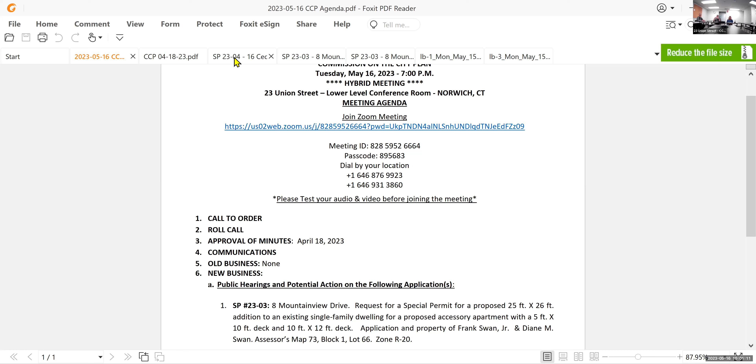I'm just going to read this into the record. This came in today. Dear Ms. Rhodes, on behalf of the applicant, 16 Cedar Street Development LLC, I am requesting a postponement of the opening of the public hearing until the June meeting of the commission.

Thank you. So that was the second public hearing on your agenda today. Do you want to do a motion to postpone that? Yeah, we can do that based on the communication. Can we have somebody make a motion to table that to June 20th? I'll make that motion. Ella's made the motion. Do we have a second? Second, from Dean. Any discussion? Hearing none, all in favor? Aye. Any opposed? Okay, so the matter is tabled.

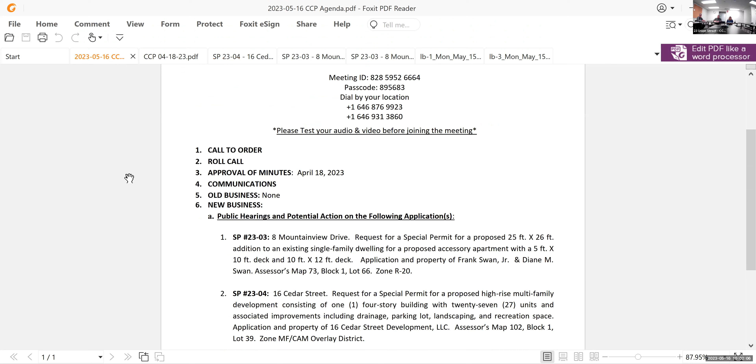Thank you. Again, no old business that I see on the agenda. The first matter we have is special permit 2303, 8 Mountainview Drive. Request for a special permit for a proposed 25 by 26 foot addition to an existing single family dwelling for a proposed accessory apartment with a 5 foot by 10 foot deck and a 10 foot by 12 foot deck. Application and property of Frank Swan Jr. and Diane M. Swan. Assessors map 73, block 1, lot 66, zone R20.

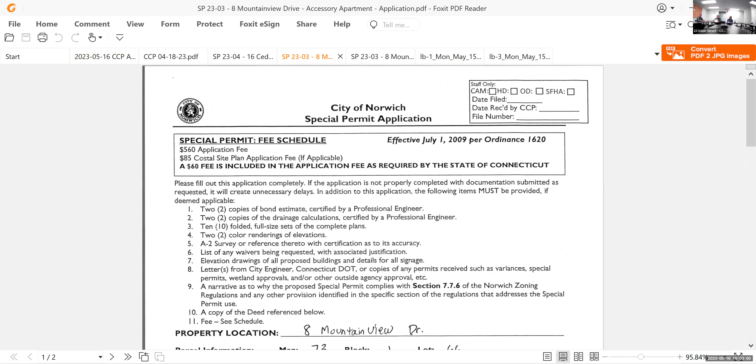So I guess we need a motion to open the public hearing. I'll make that motion. Motion to open the hearing. Second, by Dean. All in favor? Aye. Any opposed? No. Okay, so the public hearing is now open.

One speaker, the applicant. The applicant is here, so do you want him to come up to the table and sit? Mr. Swan? Yes. You're representing yourself. Why don't you come on up and tell us what you're doing? And we'll call things up on the computer, on the screen for everybody to see as well. And if you could identify yourself and address for the record. My name is Frank Swan Jr.

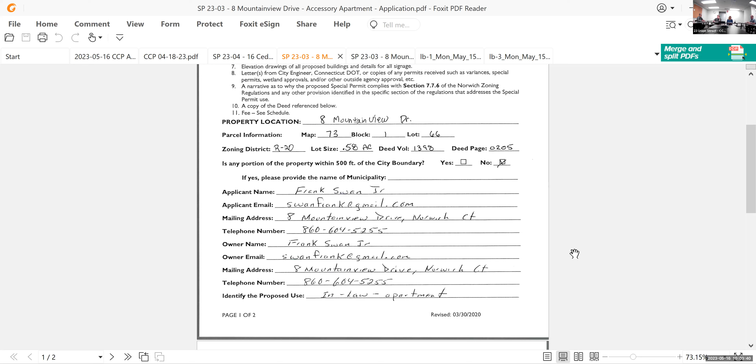And I am the owner, well, my wife and I are the owners of 8 Mountainview Drive, and we are proposing to add an addition onto my house for like a mother-in-law apartment. My mother's getting older and she's going to have to go into a home or we do something like this. That's what I'm hoping gets done.

Okay, so we'll go through the drawings up on the screen. If you could just describe them for the commission members and for the public. Looking from the street at my house, I'm looking to add on an addition on the left side of my house, 25 feet wide, 26 feet deep, and a small 10 by 12 deck in the back of it. On the side of it will be the door entrance and a small 5 by 10 deck, to get into it from stairs.

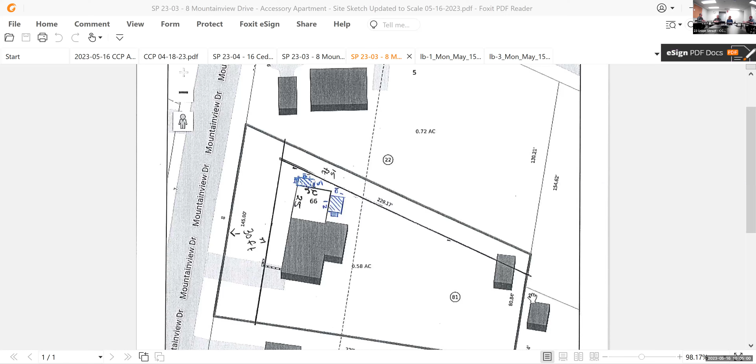Just pretend we're ignorant and don't know anything about it. Is there public water? There's public water there, but is there public sewer there? I have my own septic system with a leach field, and it was done about 5 years ago. So zoning, Uncas came and said that since it was done so recently, they don't think there's any reason why there should be any issues. And then the gas and water will be coming right from my house itself. Due to it being my mother living there, I don't think I have to worry about her ripping me off.

You got to watch those mothers, right? Yeah, it'll be good to have a babysitter. And that's really what the case is.

Those two trees right there are coming down, but other than that, that's the only thing. It'll be shaped just like the rest of the house, like an extension. It'll look like it's all one piece.

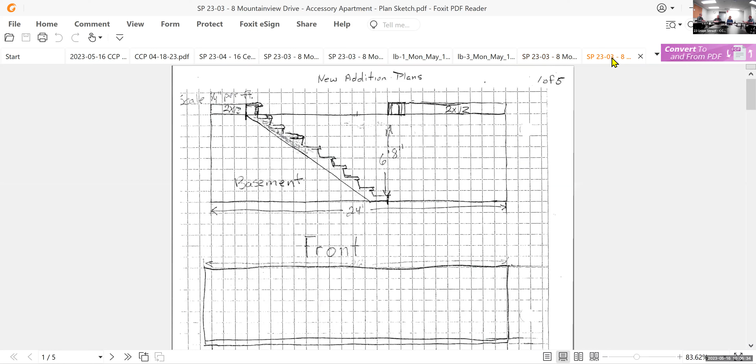The living area will be up at the upper portion. And the bottom, even though it's a raised ranch, will just be for her to store her stuff. So it's gonna be empty down there.

That would be the basement, that'd be the stairs going down. There will be a door, that's the back portion of the basement area. There'll be a bay window and a door to go into it. There's the 10 by 12 deck in the back.

She'll have a very large bathroom. We're hoping to do a walk-in bath, shower for her, so we can kind of wheelchair her as she's getting older. It just says tub on the plan, but it's gonna be like a walk-in shower.

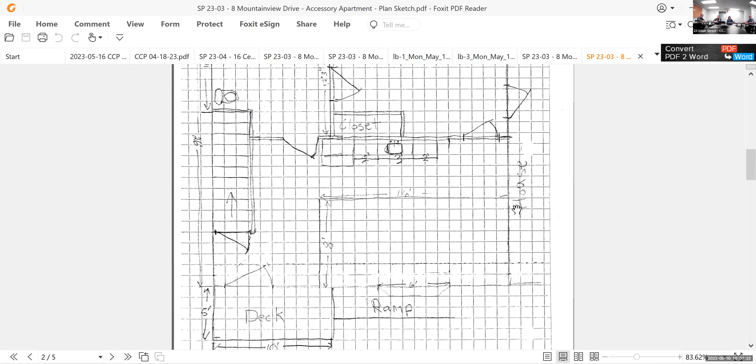That's gonna be her living room to the right, and in the front we'll have a small half kitchen type thing. This drawing is superseded, by the way, because that shows the deck in the front. That's an older one, there's another that got uploaded. I apologize, but the back portion is pretty much the same.

Updated... no, that was me.

I can pass it around if you want. This is how it's gonna look, it's a bay window, I have pictures too. It's just a bay window in the front and another window, and the door is on the side.

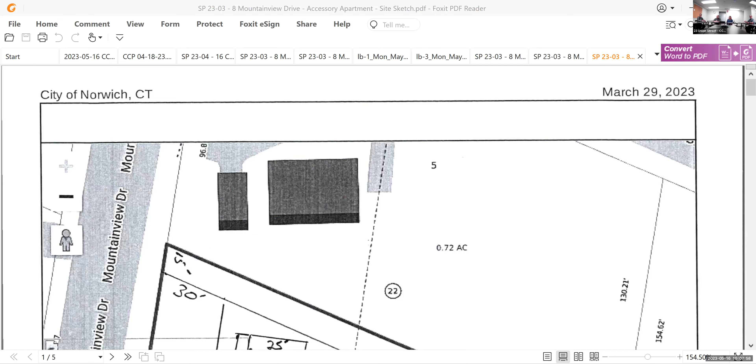Yes, that's it right there. So there's the front to match the other bay window in the front of the house, and then a door. That's the side, right down here. Yeah, the next one down showed the picture of the deck on the interior, and that's the back.

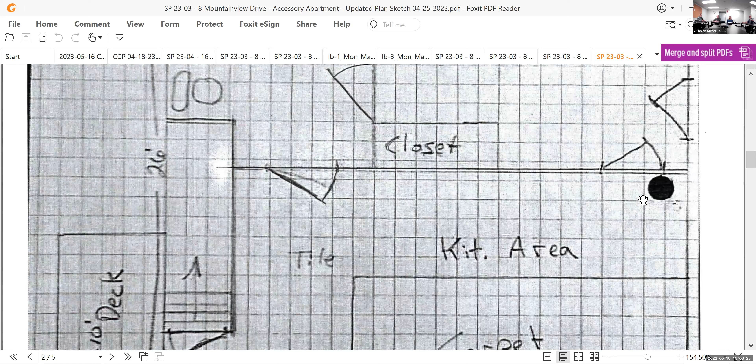That's the bathroom, the bedroom, and then there's the deck coming out of the side of it, for the door to come out of the side of the house, on the left side.

You mentioned future wheelchair accessible access to the bathroom. Are you concerned with exterior access to the dwelling? Where she's going up from ground level, she's going up stairs at this point, so mobility is not an issue right now.

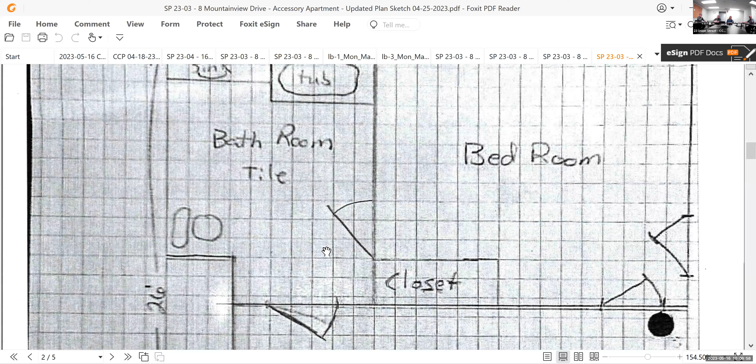But down the line, as I said earlier, we were planning on extending the side deck and getting one of those metal wheelchair ramps. Later on, but right now she can walk upstairs. She does have a walker, but with assistance she can get up and down stairs.

If you don't mind me interrupting for a second, the original design that Dan was showing had the door in the front and they were proposing a ramp. But the ramp was too steep from that door going down, it would have had to wrap multiple times around in the front. So they didn't really need the ramp at this point, and it wouldn't have met accessibility requirements in the front anyway, so they switched it to make it more consistent with our regulations.

The regulations for an in-law apartment encourage the door on the side so that you don't have the look of a two-family home, if at all possible. So that's what they modified their design for, so they could have that. Thank you.

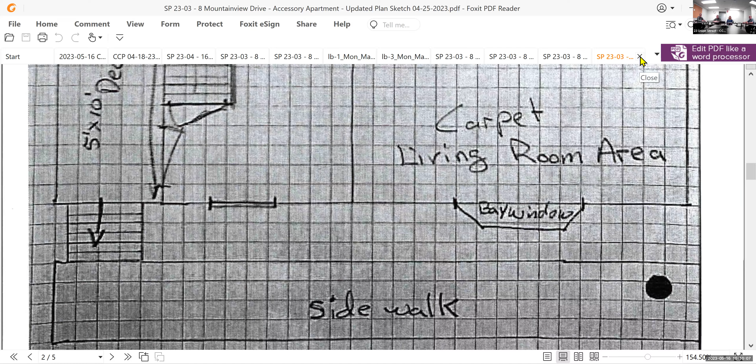No, that's okay, fine. Do we want to go over my memo really quickly? Yeah, okay, let's do that. So I have a few things that I have to enter into the record because it is a public hearing, so I can just let you know that the notifications did go out as required. Let's go over my memo real quick, then I will address some other things.

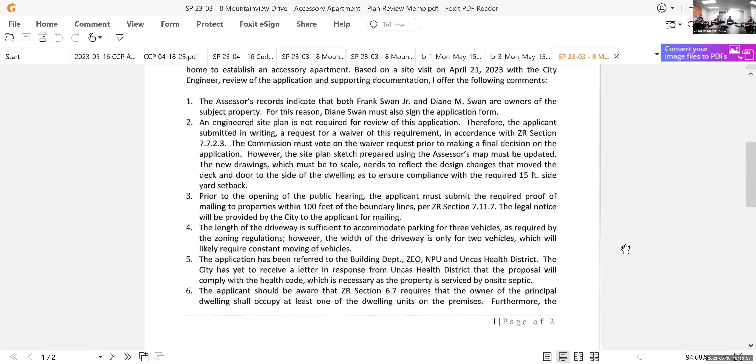Okay, so I had memo comments and they were on the website, so if you read them, I can tell you that all the first 6 comments have all been addressed. Literally every comment has been addressed.

The only thing is there is a request in here for a waiver. Number 2 was a waiver of the requirement for an A2 survey for this project because it is a simple addition that we would normally, if they were coming in, if it wasn't an in-law apartment, accept using the GIS map for. So yes, for a waiver to that, which is allowed in the regulations.

Again, he is aware of that. Our regulations require for accessory dwellings that the owner has to live in the principal in one of the units in the house, and that the unit, if rented, must be rented at or below prices qualifying for affordable housing. And there is a deed restriction requirement that goes on the land records for that to ensure that it does get rented out, because the intention really is that it was created for someone to live there affordably. So we have that language.

So after the close of the public hearing, after the comments from the public, firstly, you'd have to work on, make a motion on the waiver of the site plan. And then there's a few other criteria that I have, and I can go over those, that the special permit needs to be filed with the clerk, and we provide that.

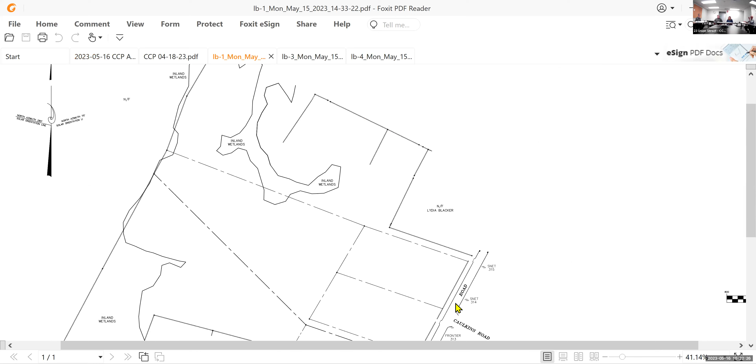All right, Mr. Gardner, I take it you're here for the applicant? Peter Gardner, 1641 Route 12, Gales Ferry. I'm here with Charles Lillibridge tonight. The property is a 28.43 acre parcel on the west side of Caulkins Road in an R80 zone.

What's just been outlined is the boundaries of the property, and that plan on screen shows 7 lots that we're proposing. This property's been in the Lillibridge family for 6 generations. We have a plan set that consists of sheet 1, the general notes, location map, and the 100 scale that shows the boundaries of the property and how we have a match line that goes to sheets 2 and 3.

This plan also shows the abutters. This is a 40 scale plan, on the screen with 2-foot contours. The inland wetlands is flagged by a soil scientist, the 100-foot upland review area, and quite a bit of detail on conceptually how the lots can be developed. We show a home, a septic system, well, topsoil stockpile, erosion sediment control, and conceptual topography. Test holes were witnessed by Uncas Health, and the Uncas Health District has reviewed and approved the subdivision plans.

This sheet also has different kinds of scallop lines. One is the approximate location of existing tree line, and the second is conceptually how the clearing limits could take place. One of the comments Deanna came up with was that we may have some mistakes with the existing tree line, and we'll correct those.

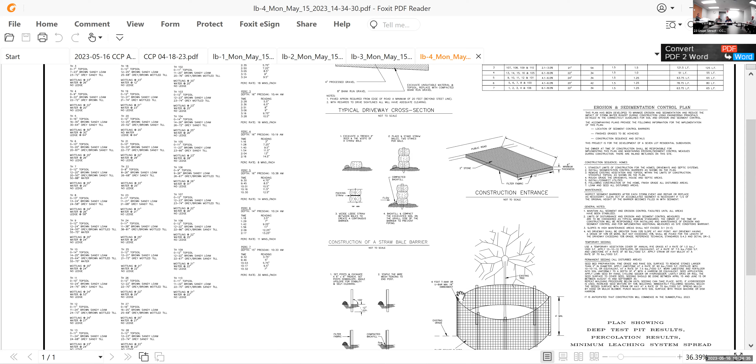The property—we attempted to address any concerns with solar orientation. The 4th sheet has test hole data, a series of general notes, an erosion sediment control narrative, and some details, including one to protect trees. There are some significant trees on and about the property, and the goal is to protect those that aren't in the way of either sight lines or proposed development.

So Deanna, do you want me to roll into your memo? No, I just didn't know if you were starting to do that, because I don't think they've seen today's memo yet. So we'll just go over your plan, let's do it.

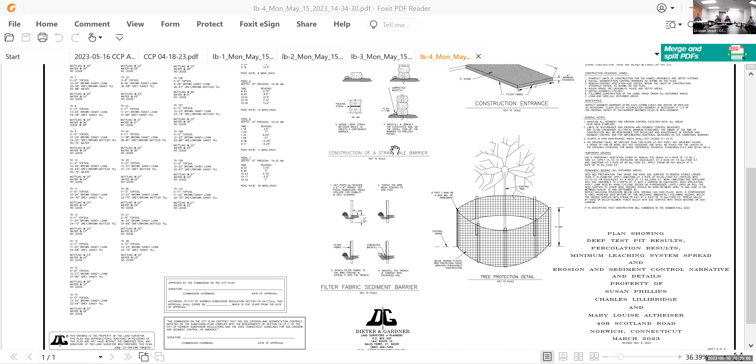This is a good picture because it does show some of the detail that's involved. We also show the storm drainage in the street, and which way that's running. As required by the health department, we would put a note on lot 3 that a pump system may be required to utilize the tested area.

There are a number of stone walls on the property, and we've attempted to show those on the plan. There's no intent to remove the one along the street because it's a nice wall on the street, and we should be able to maintain that wall and get our sight lines without any damage to it. The wall is within the town right of way—the base of the wall is town right of way for the most part. Where we're looking at it right now is the hatched area with the leader from the area dedicated to the city. That's gonna put the wall entirely within the city right of way. Otherwise, the Lillibridges own the wall that's facing the street.

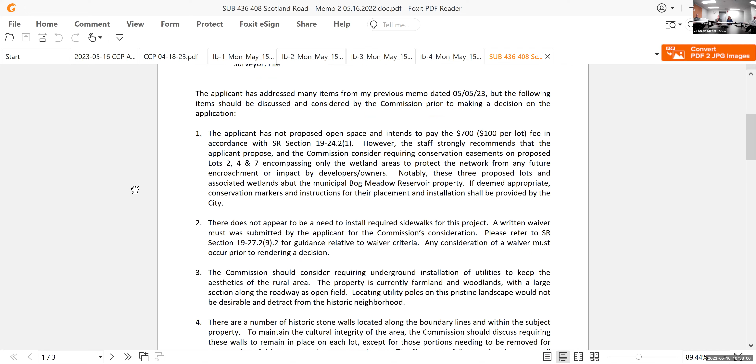Let me see what else we have. Mr. Gardner responded to my memo and addressed most comments. Today I updated that for the items I still felt I wanted to bring to the commission's attention for you to discuss. So I'm just going to go over those. Is this my memo of today? Yes. So the applicant addressed many items from my previous memo, but the following items should be discussed and considered by the commission prior to making a decision. Again, the applicant, his engineer, and surveyor are available to talk about these.

The applicant has not proposed open space, and he intends to pay the $700, which is $100 per lot, in accordance with the regulations. However, staff strongly recommends that they consider at least a conservation easement on lots 2, 4, and 7, encompassing the wetland areas to protect that network. It's very close to the reservoir property, the city's land. If it was deemed important to the commission, we would provide conservation markers for it.

So do you want to call up that overall plan so they can see where lots 2, 4, and 7 are? Yeah, that's the first one. You can see those are the wetlands, and the reservoir property of the city is right behind there, and the network of wetlands is right back there. So that was just a suggestion. Obviously I don't think the current owner would be encroaching on that, but potential future development on these lots, people aren't always aware. So it's not so much the upland areas, but at least the wetlands themselves, to prevent encroachment, just because it's so close to the reservoir.

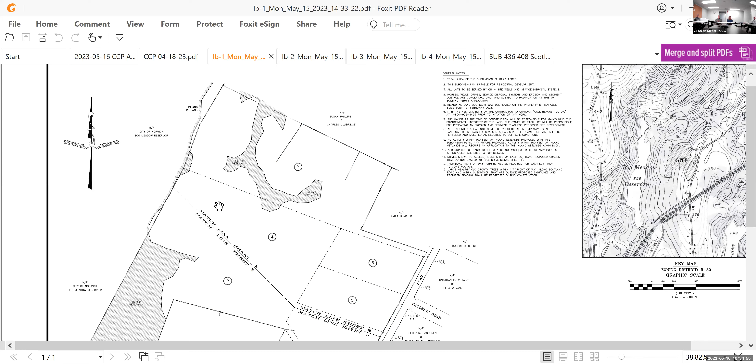Would you do the easement at the wetland limit or 25 feet from the wetland limit? Whatever the commission felt comfortable with doing. That would just be my recommendation, that it's really about the wetland itself. It's very hard to delineate the extents using the wetland flags because they'll be gone at some point, but the markers would be at the edge of the wetlands. You would post the conservation markers at the edge of the wetlands. And what would this allow the owners to do as far as with an easement?

What could they do, what could they not do with the property? They can do anything with the property, just within the area of the conservation easement they wouldn't be able to disturb it, except for something like if trees fell into the wetlands, they could by hand go out there and clear those out. They would just have to notify us they're in the easement area, but it prevents them from putting structures in there or dredging it, deciding to try to create a pond out of a wetland. I was just going to ask you that, because that lot where the writing is, there's a spot right there a pond could be put in, would have been nice.

So this is really for discussion between the commission and the applicant, but from our standpoint it's really about protecting the wetland network. But again, maybe there are some valid reasons to have the farms. It's not so much a farm community anymore because now it's residential, single family houses there, a little different than if it was a farm agricultural use. So that's something, I'm just going to go through my comments and you guys can talk about those. We'll leave the memo up. There does not appear to be a need to install the sidewalk.

So again, the waiver to talk about and consider. This came up about underground utilities because the commission in the past has required underground utilities for electric lines. Some of the properties have pretty significant driveways, back 600 feet, and to have poles going the length of the driveways just isn't really aesthetically pleasing on a historic and scenic road. There's some question by the applicant about where the authority is in the regulations to do that, but it says in our regulations, all approved utilities, so I think it kind of allows the commission some discretion there.

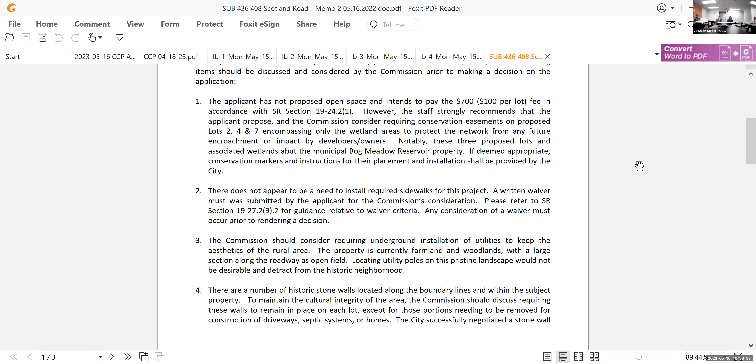Sheet 2. Lots 5 and 6, for instance - that one has brush growing over it. There's the two walls, I'm not quite sure where they are there. Yeah, it's right there with a line where he's put his hand. There's 2 walls there.

Is that north and south he's going, or east and west? It's going north-south. Because my mother - she died 10 years ago, and probably 15 years before that, we sold several of the walls to Jimmy Frazier. So where it shows walls, there's basically 1 or 2 stones on top of each other - there's really no walls there anymore. The only ones there are on the front lot towards Norwich, and there is a wall there, a little lower, but it's going to go right through the middle of the house and the septic system, so that would have to come out. So there really is no wall in there, because I know you're envisioning a nice pretty wall, and they're not there.

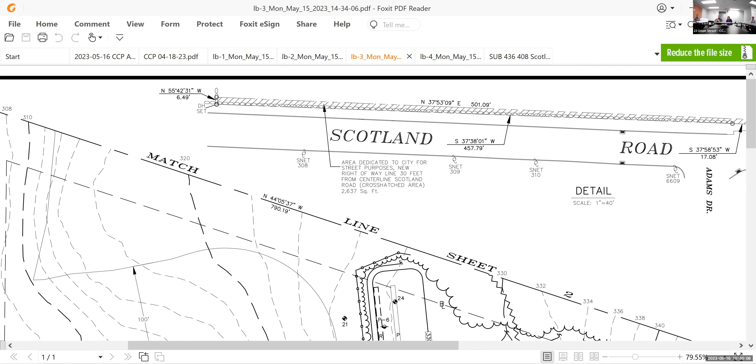Well, I walked the site. Have you? Yeah, I walked the site. So go to the further southern lot - what sheet would that be? Sheet 3. Isn't there a wall on the southern lot too? That goes right through the middle of lot 3. That's the one Charlie was just talking about. No, go all the way down, move the page up - that wall, right there at the end, the last one, that's there too. That's a nice one.

If I could interject a minute - I think we could all agree that the boundary walls, this wall on the street, won't be disturbed with the exception of for sightlines on the street. So if you feel the need to have a stone wall preservation agreement for what I just mentioned, I don't think you should have any issue with it. For the boundary walls at least, they should stay.

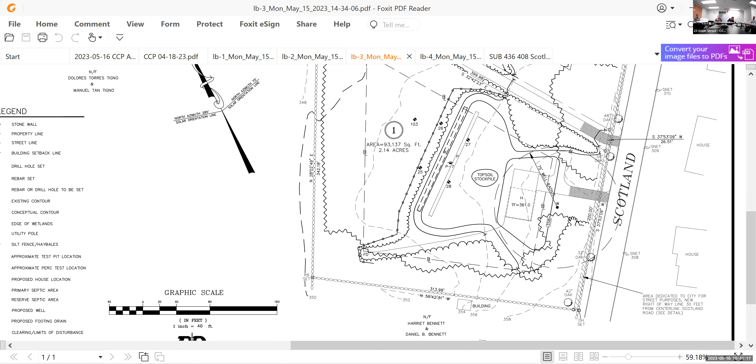My dad always said stone walls are good, they don't rust, they don't rot, they're always there. If somebody likes the stone walls on their property, they can keep them, they can fix up the existing interior ones if they want, like we did - clear them out. I think preservation of that wall along the roadway is good. As a surveyor, you've got it, you can't mess with the boundary walls - we never had intentions of touching it, preservation just puts it on record. Right, so we'll do that for the boundary walls.

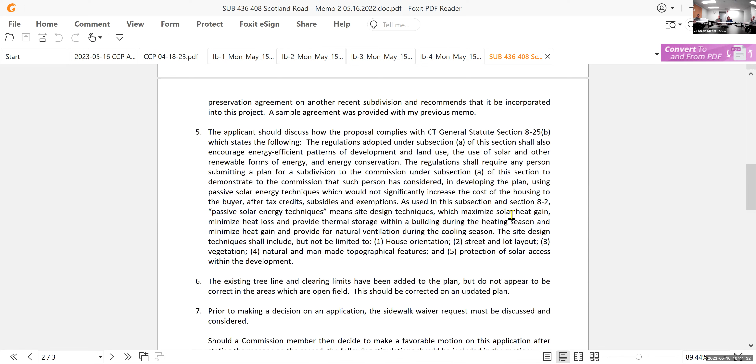Okay, and then this is where Peter started talking earlier about - I hate this subject, but it's about solar. I'm being honest with you, it's not my favorite thing, but the statutes talk about how you orientate houses to take advantage of passive solar. Subdivisions need to require and look at house orientation, how they sit between the street and the lot, the natural and man-made topographical features, and protection of solar access within the development. Can you describe how you considered solar in your proposal?

Well, in all cases I tried to get garages on the north end of the homes. Typically you don't heat the garage, and that would give most of my home the southern exposure, especially the lots along the street. The ones out back, there's some woods and trees, so you're not going to be able to take advantage of solar that much back there. But I've also used my north arrows to show the proper way to do solar orientation.

I don't like that right either, because once we're done with the subdivision, John Smith is going to buy the lot, and who's going to look after solar orientation at that point? So my recommendation, and I agree with you on this, is that maybe something should be on the plan that says a plot plan should look at the orientation of houses to take advantage of solar, some language about that. That's if the homeowner wants solar, right? No, we're not talking about solar panels, we're talking about situating your house so it takes advantage of natural heat and natural light - how you angle it. That's fine, it's more for later, okay.

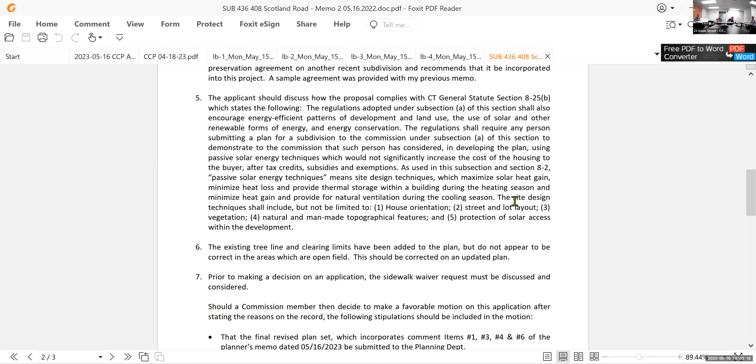My last thing is these are my conditions, let me fix those now. First, do you want to have a conservation easement on any of those lots to protect the wetlands? It's up to you. Well, the wetlands come under the wetland regulations, unless we're going to have a 25-foot setback from that. To be honest, I didn't walk the site, so I don't know, and you indicated one of the wetland areas might be able to be used for a pond. I would hate to see someone who wanted to do that not be able to. I agree with Kathy, I don't see that we need to enforce a conservation easement, especially since they are wetlands and any activity is controlled by inland wetlands.

To be honest with you, I'm in a subdivision that has a conservation easement, and it's a pain. Everybody who has the conservation easement on their property has the signs going around, and they've cleared out all the underbrush - it's like, okay, they're not really effective. Well, the second issue you have there is policing. Right, exactly, so it's not effective. It's the only tool we have to keep people out of wetlands and doing things like picking all their leaves and brush and sticking it in the wetlands - just to keep people out of there.

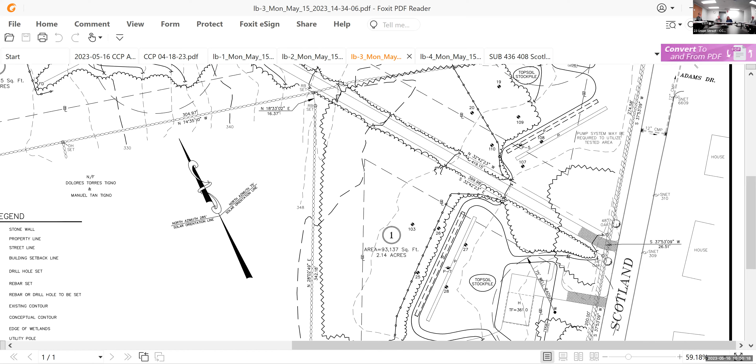I don't want to be a wise guy here, but we have prepared plans that conform to the regulations. The regulations don't require underground utilities. And my experience doing this work for a number of years is the commission can't require something that's not in the regulations. So if underground utilities were proposed, they'd have to be offered by the owner of the property. I don't think you require that.

You don't want to count. She's thinking about the homework you just gave her. No, we're in very similar thought processes. I'm not just - but it's, I mean, really.

Well, why don't we keep moving on and get through the rest of it? And you can talk about the when stuff. We get to the point where we make a motion - that'll be one of the things we can decide, have discussion at that point.

Okay, so that was number 3. The last one's number 4. We already talked about the stone wall, so we'll leave that, and that's at the boundaries - just so I can update that. And then number 6 was the tree limits, we're gonna correct those. So let's go back to these conditions I had come up with, that the final set incorporate comments 3, 4 around the boundaries, and 6.

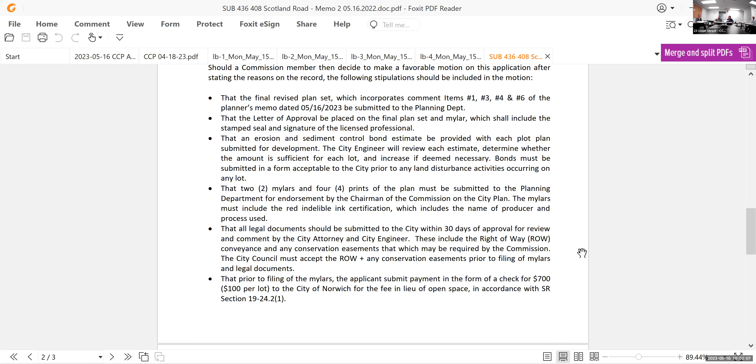You're gonna discuss 3 again. Letter of approval we placed on the plan - erosion and sediment control bonds will be for each lot, so we won't be doing anything up front, unless you decide to do all the utilities beforehand, and then I'll need a bond for that. The Mylar requirements - the legal docs have to go to the city attorney, and those include that right-of-way strip, the $700 to the city for open space, and then the certification that the boundary markers are in. The Mylars have to be filed within 90 days. So those are my conditions.

I have a suggestion. Along with the written certification, I think the best way to do this is for us to do the monumentation before the Mylars are printed, so the Mylars will show what's been set at all angle points and corners. Okay, that's fine - because it just says have been completed in accordance with the subject, it doesn't say you can't do it at that time.

subdivision plan, show set markers - how's that? Okay, so I'll do that. So those are the only things left that we need to discuss, everything else that's kind of it. So those are my conditions, and again that first one would be get rid of item 1, because we're not gonna do that. So if you want to discuss 3 - and number 4 and 6 have already been agreed upon.

So I have a question about 3. What, can we go back? Oh, and the sidewalk waiver, don't forget, you have to do that. What's - I'm lost on the numbers, sorry.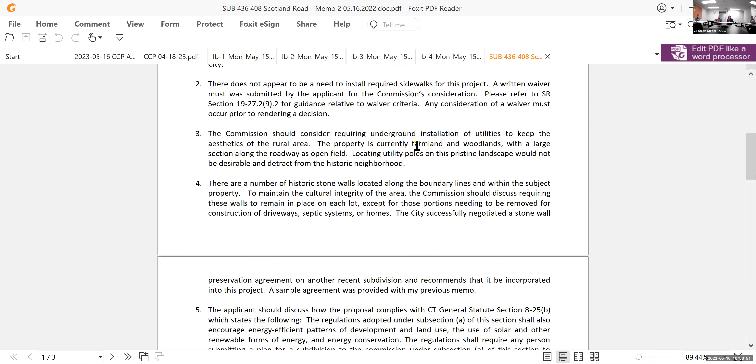So the first, go back to - show the numbers, hold down here, that first bullet point that I have. One is the open space. Yeah, we got rid of that. Number 3 - wait, what do you mean got rid of? You agreed that you're not gonna call for conservation easements. Number 1, you decided no conservation easements. Right, so we're not including that, but we can get an open space fee. Yeah, we're getting that. Oh yes, okay, that's in the motion. Okay, so number 3 you still need to discuss, which was underground utilities.

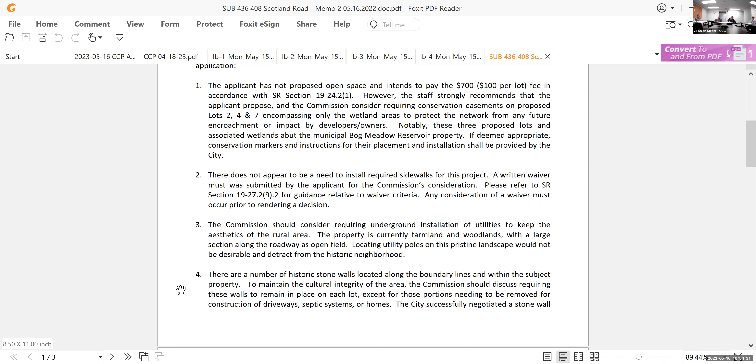Number 4, the applicant has agreed that they're gonna do the preservation of the walls along the boundaries. And number 6 was the clearing limits are gonna be adjusted on the plans. And actually I'm gonna add number 5 too - number 5, you're gonna put a note relative to solar on plot plans. Yep, okay, we'll talk about what that should reach.

So could I just suggest a compromise on the underground? Sure, if we can put a comment on the plans about orientation for solar.

Can we just add that underground utilities would be encouraged but not required? The applicant is shaking his head yes, but I just want to clarify, the solar thing is required by statute, it's not a recommendation. But if you want to make a recommendation on the plot plans, you could.

And since it only really affects these one or two lots, I don't think it would be an issue. To me, Mike, doing something like that is good. Deanna, I have a quick question.

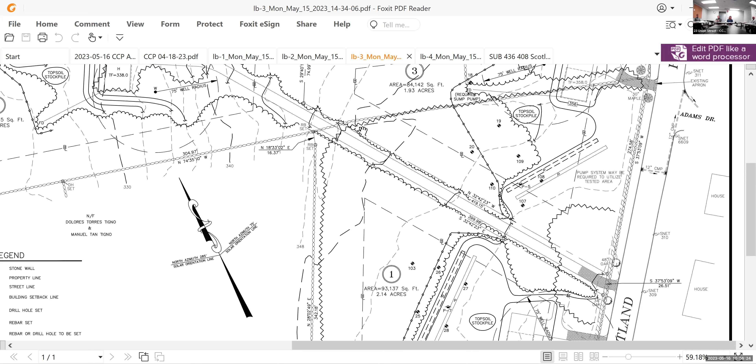But you also want to protect the value of people who are buying the property. So that is one of the ways you can protect that value. I personally would not want to see that when I spend a lot of money for a lot. Why would I want poles going past my property? So just in that one area, it's going to protect the value of that person's property, and it's going to protect the aesthetic value.

In the areas where there are trees, I'm not that concerned. But I don't think that's our job to protect aesthetic values, and I don't think we have the authority to. A recommendation would be nice, at least let the people think about it, and I imagine decent people probably would do it. But why require them to do it? It's like putting a gun to their head and saying you've got to do this to buy this land.

Then it ain't a free country anymore. I wouldn't want... you buy the lot, build your house, and then the next person buys the interior lot, and they put poles all the way back. You spent a million dollars on your house, and now you're looking at that. Just change your regulations to put it underground.

Well, I think we have some jurisdiction over that. Deanna even said that. I think we can do it. It basically says approved, so we have to approve it. What NPU said is it's up to the commission, they said they can do underground or overhead, they don't care. So I think there's some flexibility in how you read that. What needs to be shown on the plan is all approved water, gas, and power lines and service connections. I think if the commission decides what's approved, since NPU says it doesn't matter either way, that's a pretty broad reading of our authority, in any event.

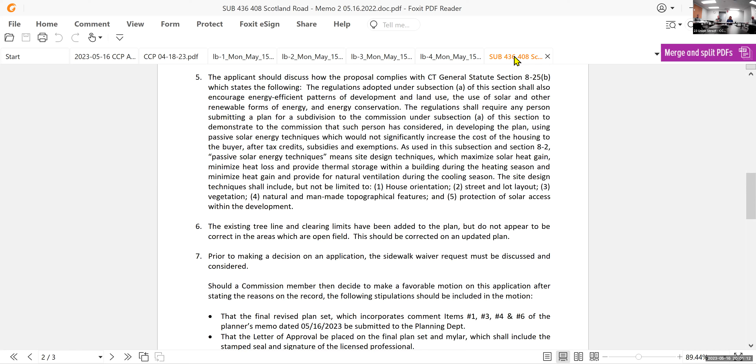And then if somebody can make a motion regarding the substance of the subdivision plan. Okay, I will make that motion to approve the subdivision plan with the condition that they pay the open space fee, that underground utilities be provided in the area of the farm field, and the preservation of the stone walls on the property limits, we should have a preservation easement on the stone walls.

Isn't that a law anyway, the boundary around, you have to leave the walls? It's a preservation easement to make sure that if there's historical significance, someone doesn't try to just put pins and markers in instead. No, yeah, they can reset them with something else, but we want to preserve them.

Okay, and the solar note and adjust clearing limits or the tree line as Deanna indicated. And I think that was it, Deanna, is that right? And just the other standard conditions as Deanna has outlined. Okay, so Kathy's made the motion as she has stated it.

Is there a second? I'll second it. So there's a second, discussion. My discussion is I'm not in favor of it with the underground utility requirements. If there's no other discussion, then we'll vote on it as it's set forth. All in favor? Aye, aye. Opposed? Okay, so Frank being opposed, and Ella. So it's carried, 3-2.

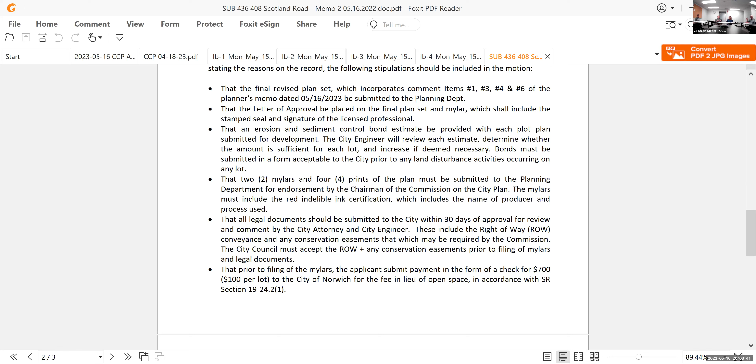So the underground utilities, will they have to go all through, or just through the farm? The portions that are through the farm fields need to go in. Specify which farm field you're talking about. I think we should probably clarify that. Deanna's gonna go out there and establish that. Is that all right? Yeah, unless we settle it tonight for lot 2. Lot 2 is the one that has the driveway going diagonal through the field.

Where's that? Yeah, I gave you that drawing right there. Okay. Here's the other one between 3 and 5, and these tree limits aren't really shown right, so this is really all field in front.

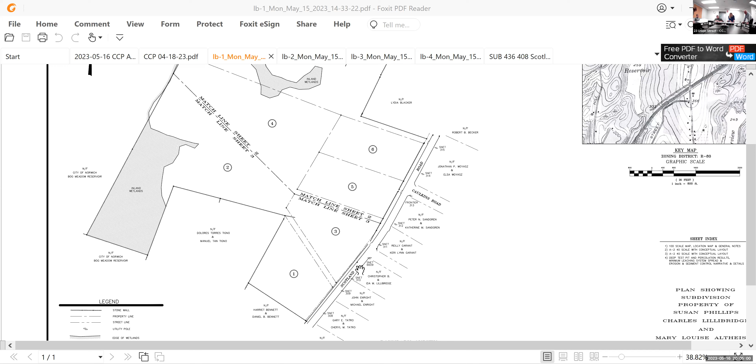This one right here, yeah, that's a stone wall, which you see right there. So this lot is between 1 and 3, that's lot 2, and this one is lot 4. There's a lot of woods in that one, well, just in the area of the farm field.

I think we should specify where you want these underground utilities on the record. Underground utilities in the farm fields that access lots 4 and 2, is that what you're saying? I think you need to reference the driveways you're talking about. Let me give it a shot again. From what I'm hearing, we're talking about the first, from the edge of the road, about 230 feet in on the driveway serving lot 4.

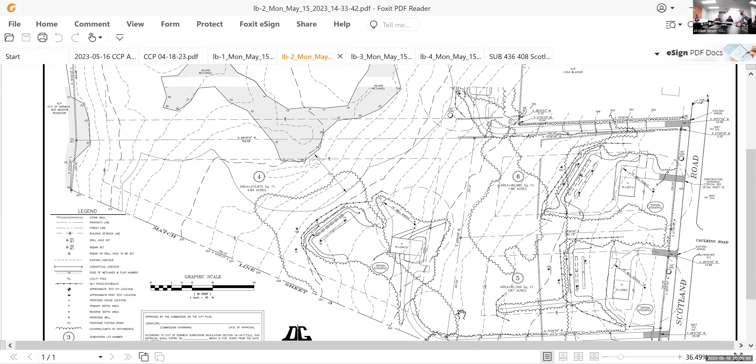That brings us nearly to where our wall was. So is the wall right here, Peter? Yes, okay, so this is the wall, right there. And then the driveway serving lot 2, pretty near 400 feet, which brings us right there. So 230 feet of the driveway serving lot 4, 400 feet of the driveway serving lot 2.

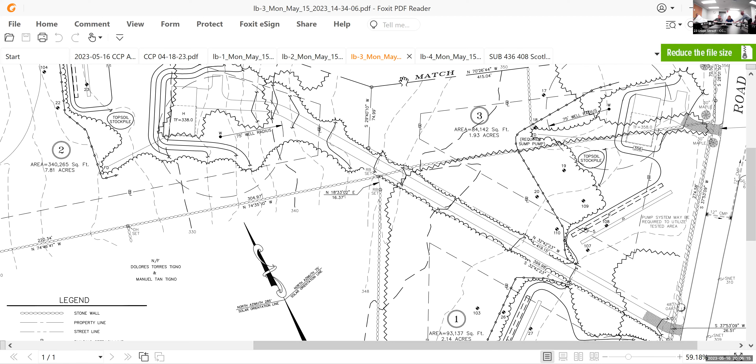Now in lot 7, there's a line of trees, there's almost a laneway there now, that's existing, the last driveway into it, that's almost already like you can almost drive back there now. So let's clarify, the underground utilities for lot 4 for the first 230 feet, and the underground utilities for lot 2, right, for the first 400 feet.

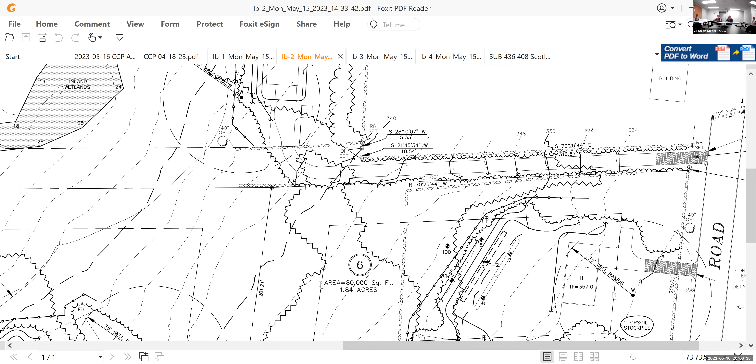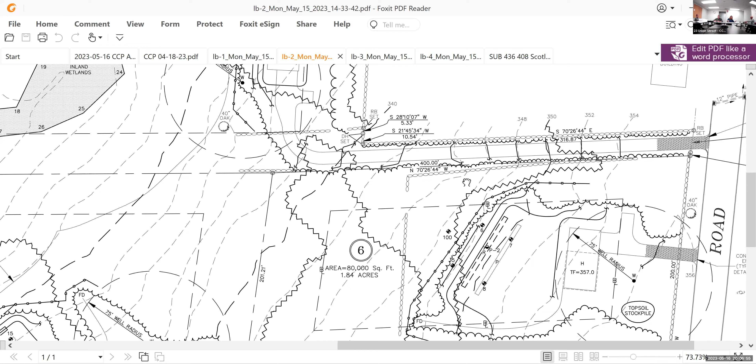Yes. All right, I think we should amend the motion then to specify that on the record. Okay, I'll amend the motion to state that. I'll second the amendment. Within what I just said, but I mean, that's going to, depending upon the actual measurement Peter, that could change a little bit. It's just within the farm field, but about, this is pretty well defined.

The field is within the walls, and there's a wall here. Okay, so that's good. Make it plus or minus, 230 plus or minus, 400 plus or minus. All right, so that was amended to the motion, a clarification.

I mean, I want it clear on the record. Kathy, Mike seconded it. Let's get it clear on the record so that underground utilities are required on the driveway for lot 4, 230 feet more or less, and for the driveway for lot 2, 400 feet more or less. So is that your motion, Ken? Yes, that's fine. And Mike, you second that motion? Yes, I do.

Okay, so this is an amendment to the main motion that we've just stated. Any further discussion? Hearing none, all in favor? Aye. Any opposed? No. So the amendment is approved with that specification regarding the underground utilities.

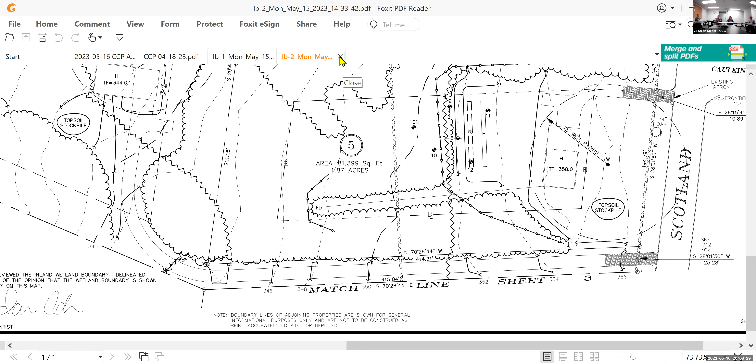Thank you all very much for your time, Keith. Thank you, Peter. Always good negotiation, I told you, that's how things get done. All right, what was the name of the gentleman at home? I don't know, Michael Lehan? Oh, the attorney, yes, Michael Lehan, he's my neighbor. Good night everybody, thank you. All right, I have actually represented some of your time.

I've actually represented some generations of your Lillibridge family. Yeah, I was in your office a couple of years ago, you were telling me stories. Very entertaining. Mike, you're disqualified now. All right, thank you.

All right, so those matters were dealt with. I see no extension request. Yes, there is, bond reduction release is 90 Sachem Street. There's no number 7 extension request. I see none. There's number 7 on the agenda. Dan had printed these out. I see no extension requests on the agenda. Oh, but I do have one. I'm throwing you under the bus. Wait a minute, this all happened after this took place.

We have a bond reduction and an extension request that came in today. That's not on the agenda yet, it's going to be modified. So can we amend the agenda to add the extension request?

What's that for? This is for subdivision 435, at 217 Otrobando Avenue, a 2-lot subdivision where they split the property for the farm supply and storage facility locations. The 90 days is up this Monday, and they're very close to giving me everything.

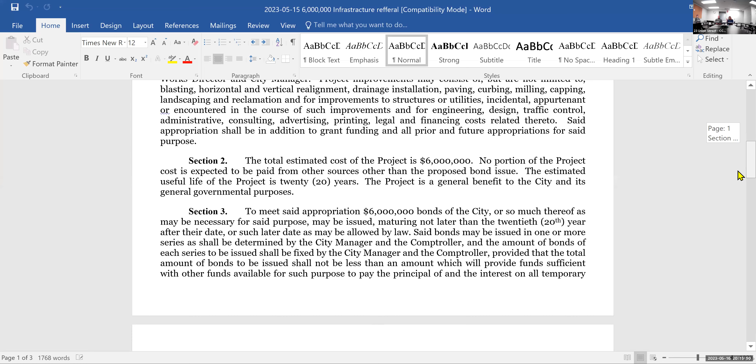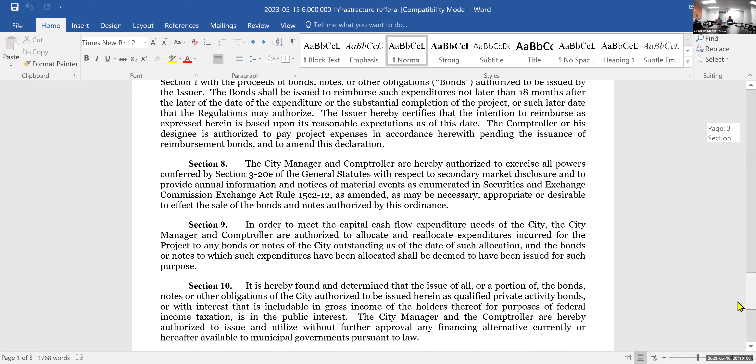So this is really a bonding issue, as opposed to it. And it will allow us to repair our roads, improve our drainage, and I think that's what we should encourage. So it's done every 5 years, you said. I think it's every 5 or something.

Regardless, it's approved at referendum. But what it really is, is a time crunch—they need to have it. I'm just referring it back with a positive or negative referral. They need to vote on it in June to get it on for November.

Really, I would move that since the program would be consistent with our plan of development, that we should approve this request. All right, so we have a motion from Mike Lehan to send a favorable referral to the city council for the proposed ordinance for the 6 million dollar bond.

Do we have a second? I'll second. Second by Ella.

Any discussion? Yeah, I just want to say, from serving on city council before, this is pretty standard. It does come up every few years that the bonds have to be renewed. It's part of the city infrastructure. It does have to go for a referendum vote. So we're not actually approving it—city council does that. So yeah, it's pretty standard.

Yeah, it just changes the way the vote is. If we voted negatively, then they would have to pass it by a supermajority. Okay, so we've had the motion and the second. Any other discussion? Thanks for the input, Ella.

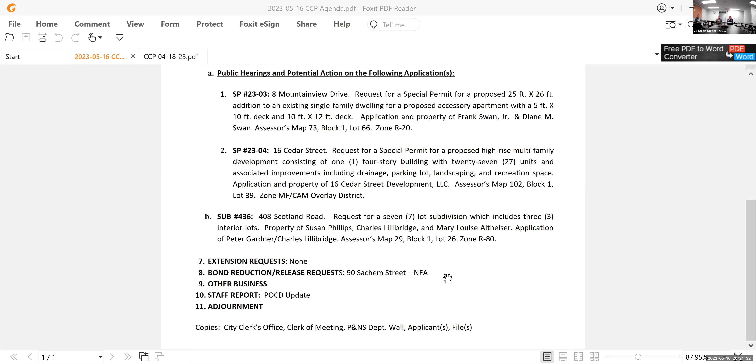We have them all the time in Preston, all the time, and I rarely get anyone opposing it, but we don't do public hearings. We don't require that they notify the abutters, but no one's ever come in complaining. It's probably because they may not have paid attention or known it was happening. If they were notified, then they get all upset like, whoa, what's going on?

I don't know, it's six of one, half a dozen of the other. I just think it's not our call at this point -- but the regulations are... we could do it in certain zones. Maybe we look at just certain ones, because to make people go through that -- I don't know, but maybe that could be something we can work into the plan.

I agree completely with Kathy on this, and I don't think it ought to be -- really, yeah, I do. Mike, you're absolutely right, and I don't think it ought to be limited to zoning.

Whether you have an R80 zone, they're excluded. If you have an R40 zone, they're included, so they all end up in the multifamily zones. Zoning has become really exclusionary. Look at the subdivision that we just approved -- she's not selling those lots for $40,000. So where's that provided?

People have the right to do something with their properties because some people don't like it, and nobody dislikes it -- everybody thinks it's a great idea unless it's happening to their neighbor. So I think going through a process that Kathy suggests is much more reasonable.

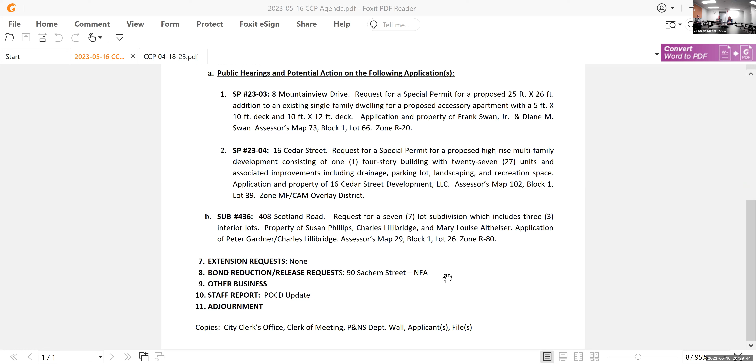But I think they didn't have a lot of money. I get so annoyed when Norwich doesn't get it though, because we are just a stressed community. We have so many things that - we should be up on top.

When I talked to her, because I submitted a grant for like 400,000 or somewhere around there, we got 60,000 of that 400. Still, it's good. They didn't have a lot of money, but she said in October or November they're going to have another round, and she thinks they're gonna have a lot more money - like 10 million instead of 5.

They got $29 million worth of grant requests and only 5 million available. Well, we didn't get any - we didn't even know the announcement came out, so I'll have to look for it. I'll send it to you tomorrow. All right, well, that's disappointing.

Remember to do that. We spend a lot of time on top of everything else we're doing - everybody wants us to help work on grants on top of everything, so it's a lot.

Back to the POCD though, Dan, you're working on it. We've got meetings - next week is the on week, and then every other week through August. And hearings coming up.

We have 3 public meetings coming up - June 28th is the one at NCDC, 2 of them that same night, and then that week, the 14th or so, is the senior center during the day.

Are you gonna send out notices for that to everybody? Yeah, we will, so if you want to come during the day, we have to figure out how we're gonna do it - we're gonna show them what we have so far, but we're still gonna give public input on that too.